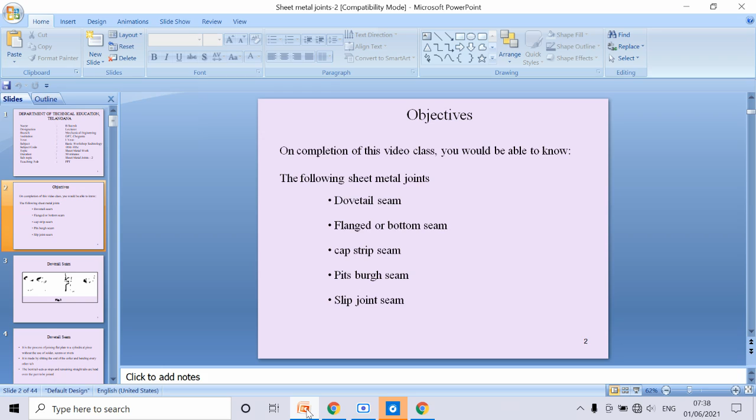I am going to deal with a subject called basic workshop technology, and the major topic is from sheet metal work. Today we are going to discuss some sheet metal joints. By completing this video class, you'll be able to know the following joints. In the previous class, we learned some sheet metal joints, and continuing with that, here are the different sheet metal joints: first dovetail seam, second flanged or bottom seam, third cap strip seam, fourth Pittsburgh seam, fifth slip joint seam. Now we'll discuss all five types of sheet metal joints.

Among them, the first is dovetail seam. Here we can see the diagrams of different components made by the dovetail seam joints of a sheet.

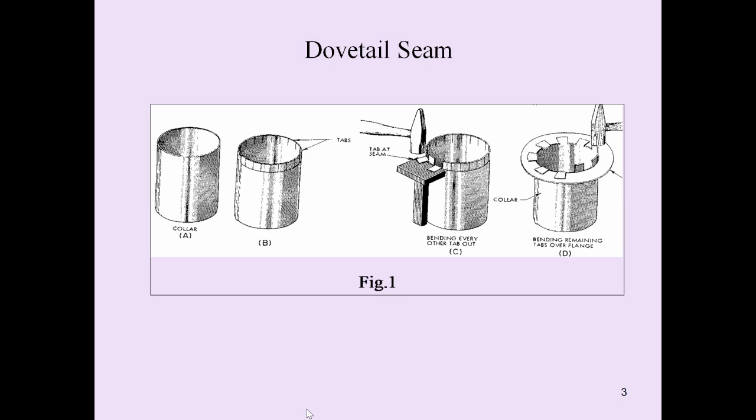In the picture, this is called a collar. On top of the collar, we have marked some marking lines to make cuttings on the mark points. In figure B, it shows some of the tabs. In figure C, it shows bending every other tab outward. In figure D, we can see bending the remaining tabs over the flanges. Here he is performing the remaining tabs over the flange. Now we'll discuss about the dovetail seam.

A dovetail seam is the process of joining a flat plate to a cylindrical piece without the use of solder, screws, bolts, or rivets. In this process we are making a joint between the flat plate and the cylindrical piece without using soldering, screwing, bolts, rivets, welding, etc.

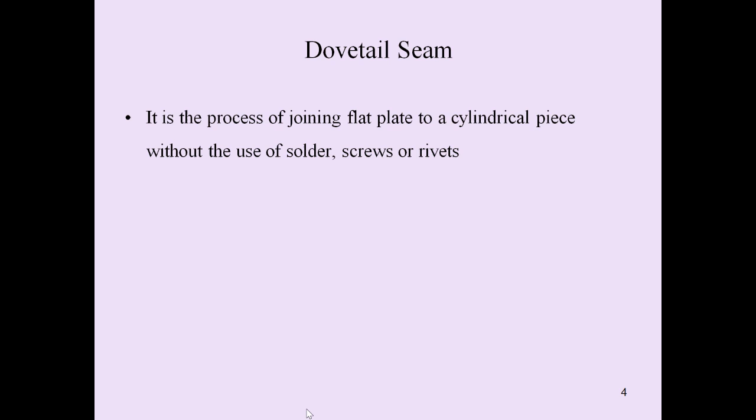This joint is made by slitting the edge of the collar. So how is this dovetail seaming joint formed? It is made by slitting the edges of the collar sheet and bending every other tab.

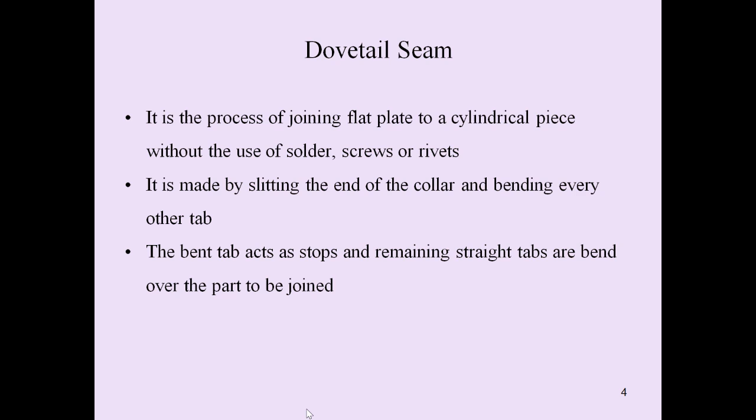The bent tabs act as stops, and the remaining straight tabs are bent over the parts to be joined. That is the dovetail seam.

The next one is the flanged or bottom seam, the second type we are going to discuss. We can see the diagram of a flanged bottom seam.

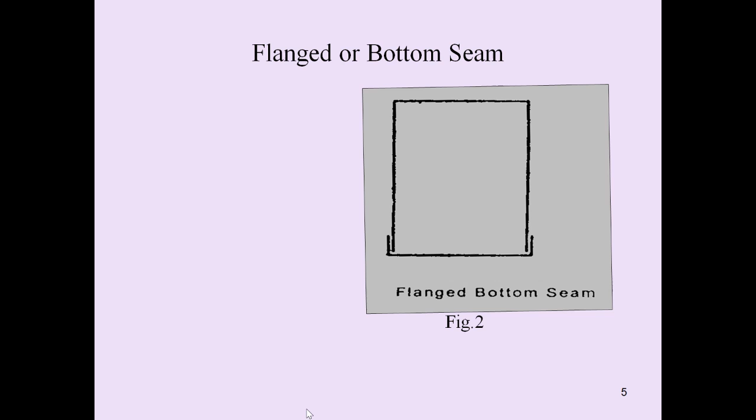Here we are using two different metal sheets. This bottom seam is used to join the bottom of the container to its body.

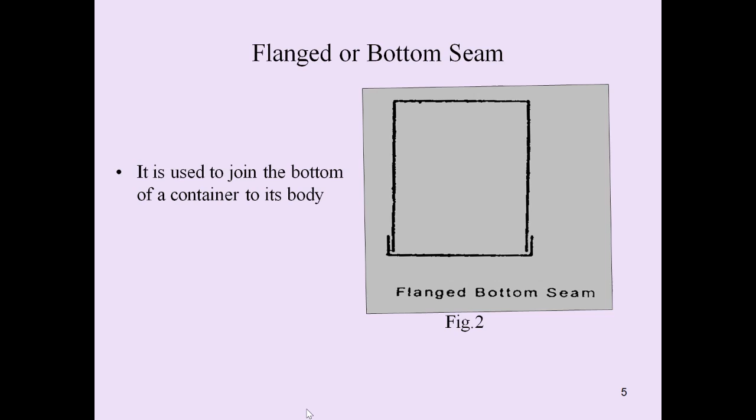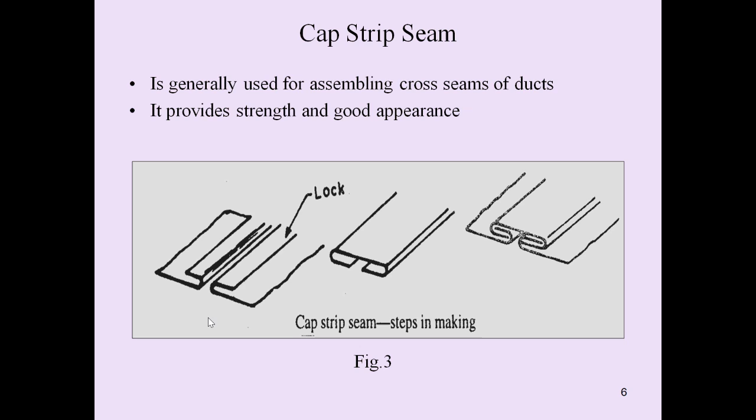Then we have to insert these two sheets into the third sheet, making a lock joint called the cap strip joint. This cap strip seam is generally used for assembling cross seams of ducts. It provides good strength and good appearance.

Next one will be a Pittsburgh seam.

The Pittsburgh seam consists of two parts: the single lock and the pocket lock. These are the two parts for the Pittsburgh seam.

The single lock is placed in the pocket lock and the flange is hammered. So part 1, the single lock, is placed into part 2, the pocket lock, and the flange is hammered.

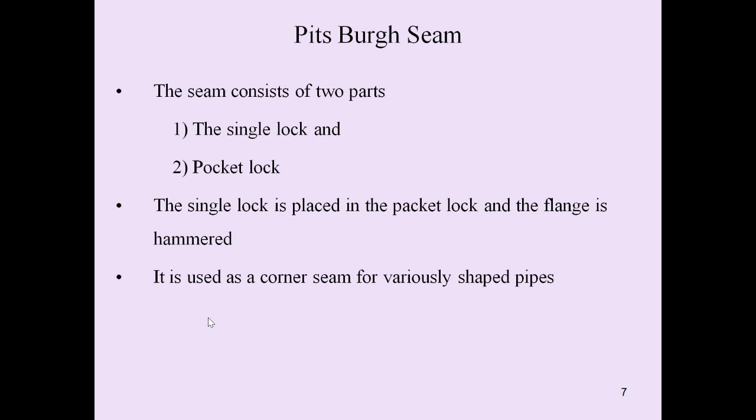This type of seam is used as a corner seam for variously shaped pipes. Next we can see the diagrams of Pittsburgh seams.

This is a Pittsburgh lock, and this will be the preparation of a Pittsburgh lock. This edge is placed into this preparation of the Pittsburgh lock.

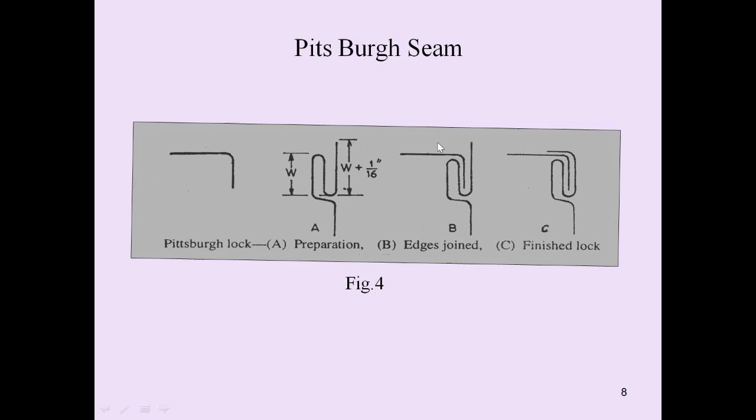So it is just joined, then finished as a lock. By bending this flanged part of the sheet, we are making the finished lock.

Next one will be a slip joint seam. We can see the diagrams of a single lock, double lock, and locks slipped together. This is a slip joint seam.

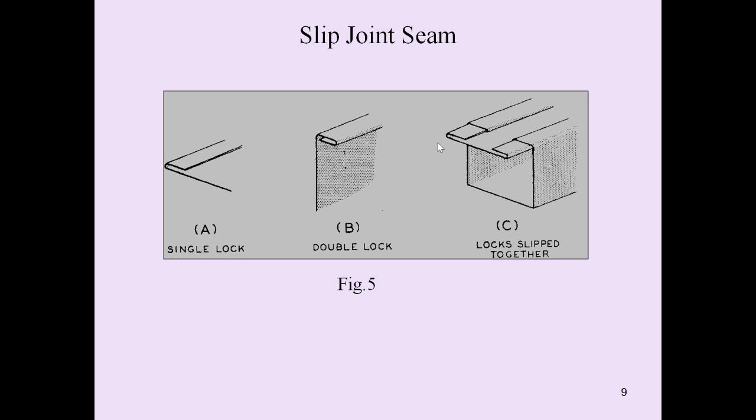This seam is used for longitudinal corner joints. So the seam is used for longitudinal corner joints.

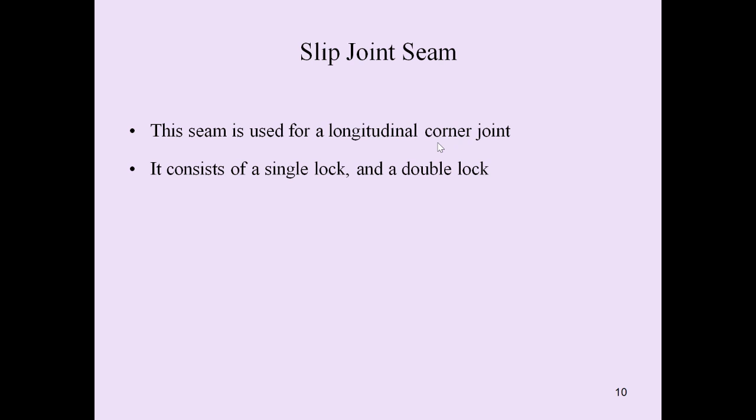This slip joint seam consists of a single lock and a double lock, that is two parts. The single lock is slipped into the double lock to complete the assembly of the seam.

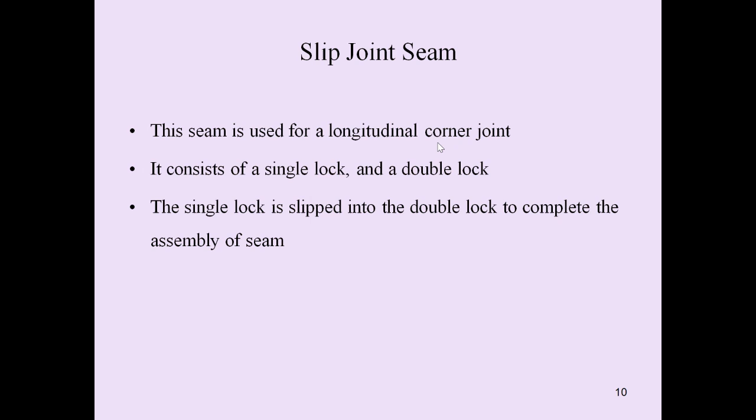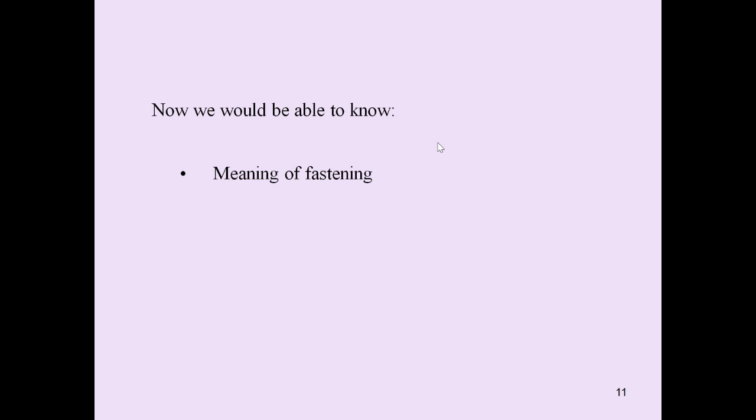Next, we would like to know the meaning of fastenings. So actually, what are fastenings? We can see the fastening definition.

Fastening means joining two parts of a production or product during the manufacturing process. This is the definition of fastening: joining of two or more parts of a product during the manufacturing of the component.

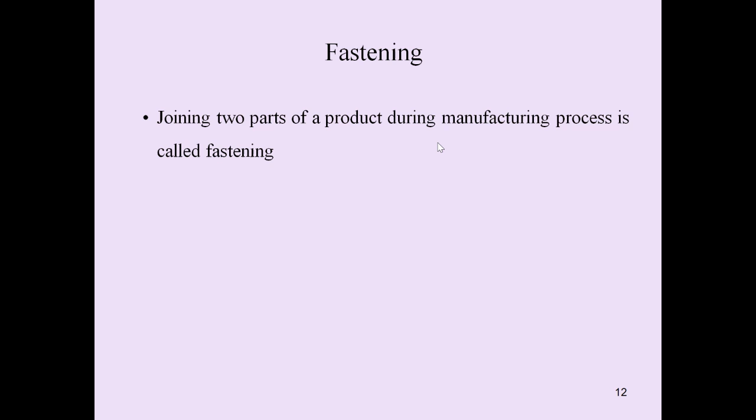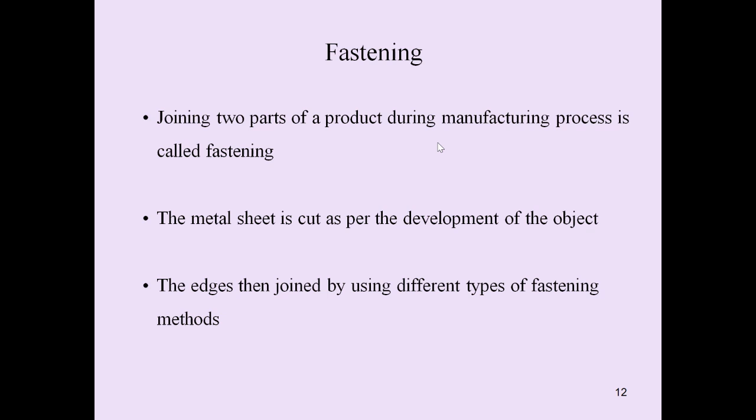The metal sheet is cut as per the development of the object. Based on the development of the object, the sheet metal is cut. Next, the edges are then joined by different types of fastening methods, where the operator joins the edges of the sheet.

We can see the different types of fastening methods: the first one is riveting, second soldering, third brazing, and the fourth one is spot welding. These are the four types of fastening methods, which we will now discuss briefly.

Riveting, the first method, is a permanent fastening method. This riveting is a permanent fastening method using rivets, which also have different shapes and sizes. By using those rivets, we are making a permanent joint.

The rivets are used to join two or more sheets of metal together, using different sizes and shapes of rivets.

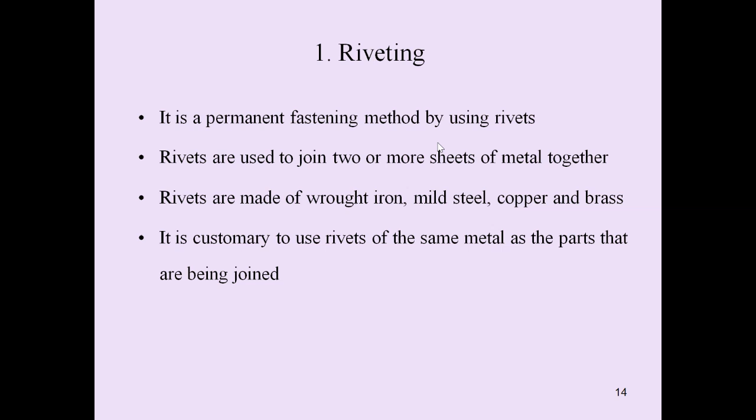These rivets are made of either wrought iron, mild steel, copper, or brass. It is customary to use rivets of the same material as the parts that are being joined.

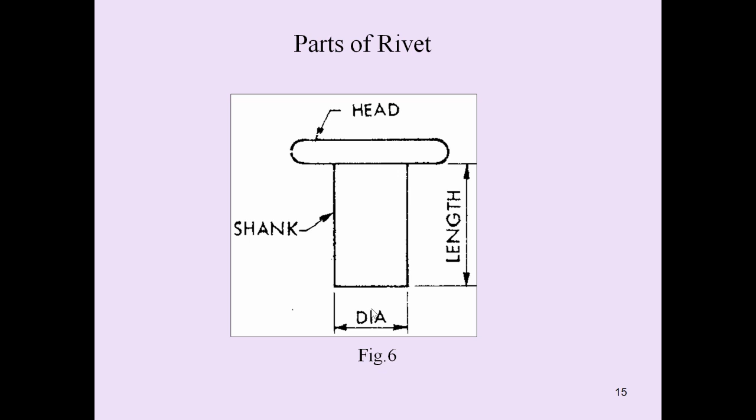Next, we can see the parts of a rivet. This diagram shows a rivet with a rivet shank and a rivet head. From this point to this point is the shank length, and this is the diameter of the shank. These are the different parts of a rivet.

Now we can see the different types of rivets. The first type of rivet is a snap or cup rivet.

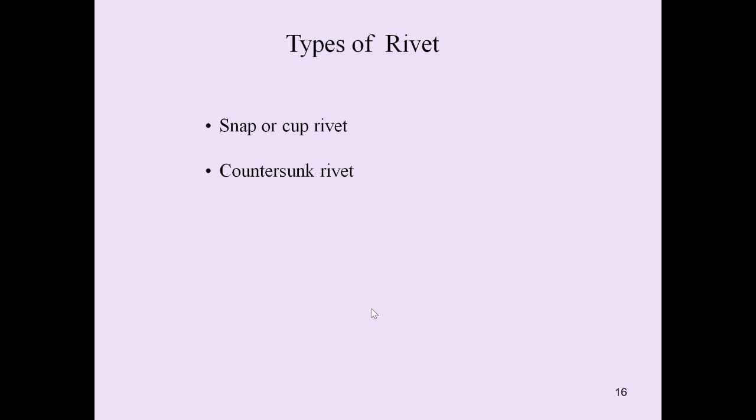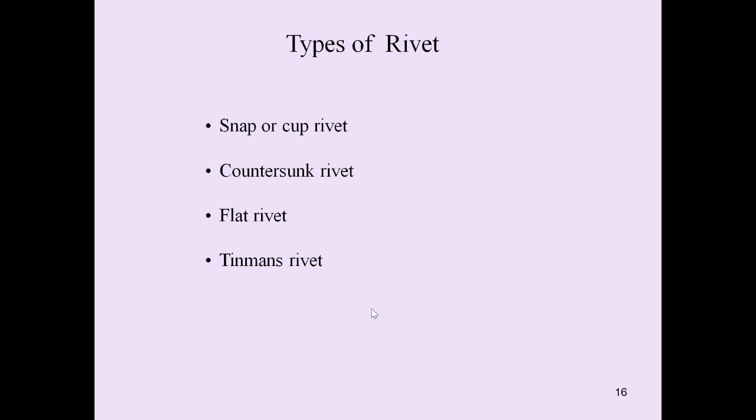Second, countersunk rivet. Third, flat rivet. Next, fourth is tinman's rivet.

Now we'll discuss all four types of rivets. The first one is the snap rivet or cup rivet. We can see the diagram of a cup or snap rivet. Based on the shape of the rivet head, it is named a cup rivet.

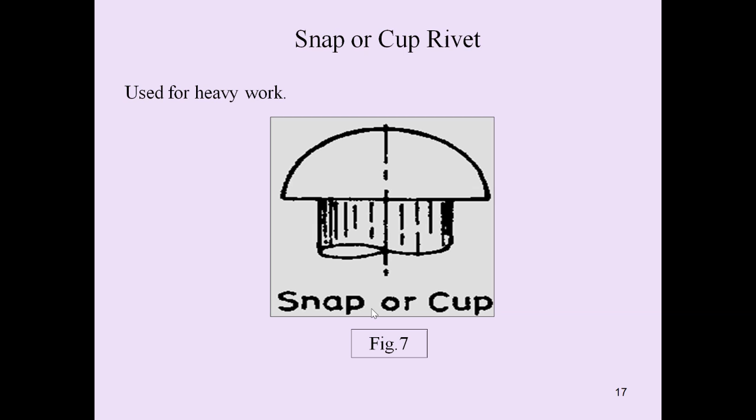The snap or cup rivet is used for heavy work. Next, the second one is a countersunk rivet.

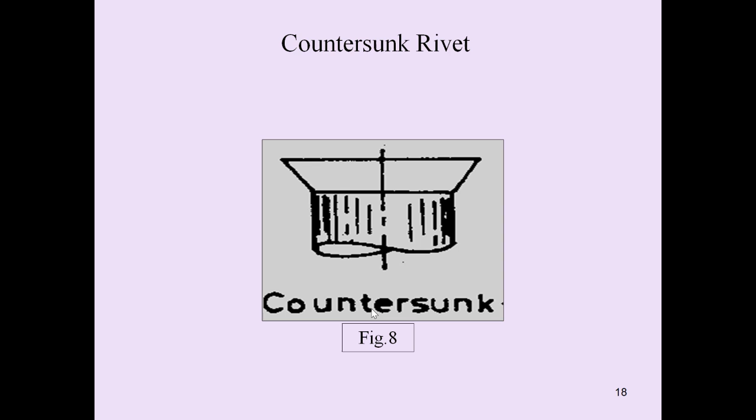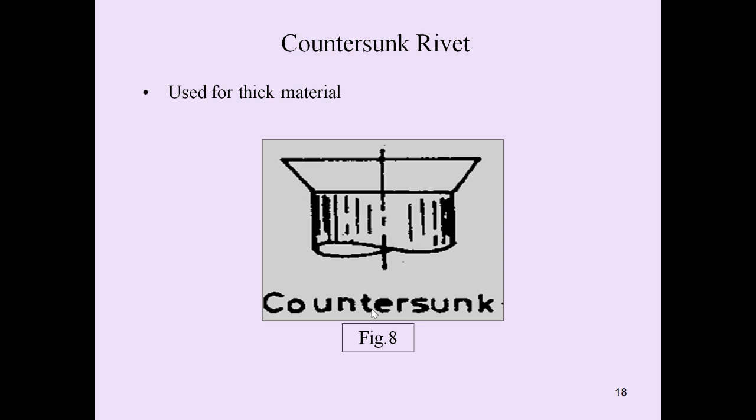This is a diagram of a counter sunk rivet. We can see the head of the rivet. Compared to the previous cup rivet, this is different, as it has tapers on the edges of the head. These rivets are used for thick materials.

Next one is the flat rivet. We can see here the head of the rivet is flat. These flat rivets are used for riveting flat bars and angle sections to sheet metal.

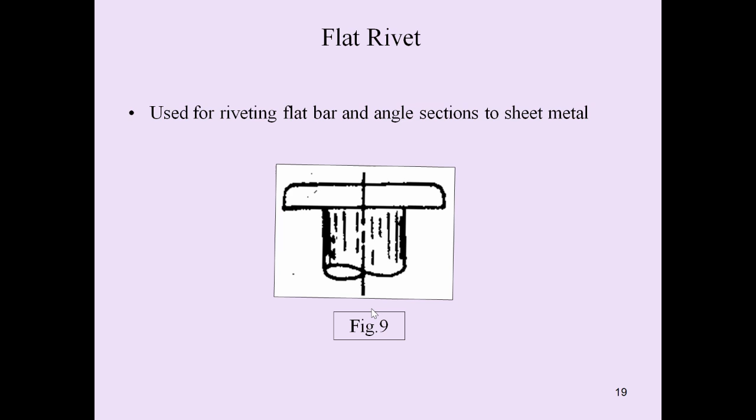Next, the last one is the tin man's rivet, used in different types of sheet metal work. We can see the diagram of a tin man's rivet.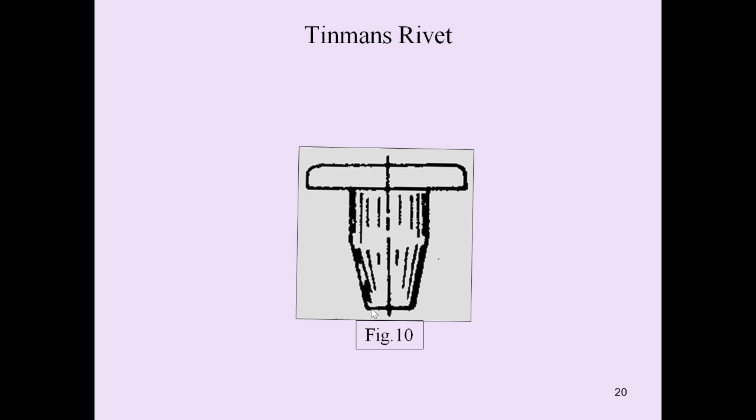The shank is tapered - this is a tapered shank tin man's rivet. The head is similar to the flat rivet, but the shape of the shank is different, it is tapered. This type of rivet is widely used in general work for general purposes.

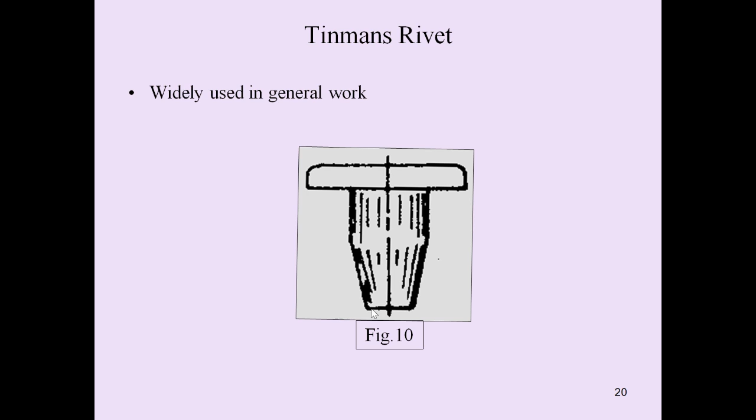Now we can see the stages of riveting. First, making the holes on the sheet - this is how we form a joint. The first stage of riveting is making the holes on the sheet.

The size of the hole depends on the size of the rivet, so we have to make the same size hole on the sheet. The size of the rivet depends on the thickness of the sheet, so based on the thickness, we select the size of the rivet, and based on that, we make the same size holes on the sheet.

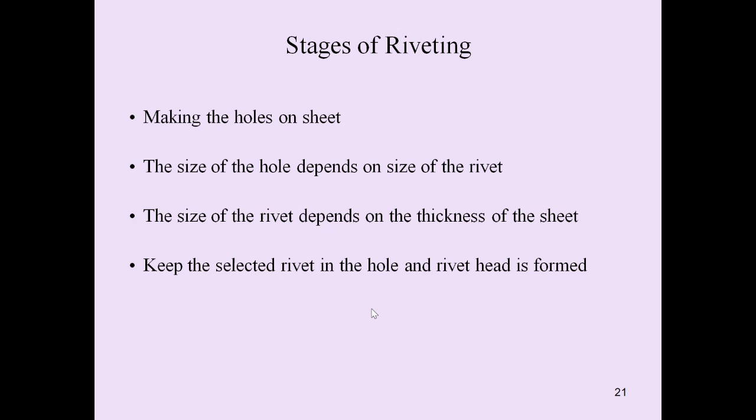Next, the fourth stage: keep the selected rivet in the hole, and the rivet head is formed. After the third stage is completed, keep the selected rivet within the hole, and the rivet head is formed by blowing on the remaining projection of the rivet, so that the rivet head is formed.

The rivet head is made using a rivet set. By giving two blows on the rivet set, we can form the rivet head. One blow flattens the rivet down, and the other blow completes the forming of the rivet head.

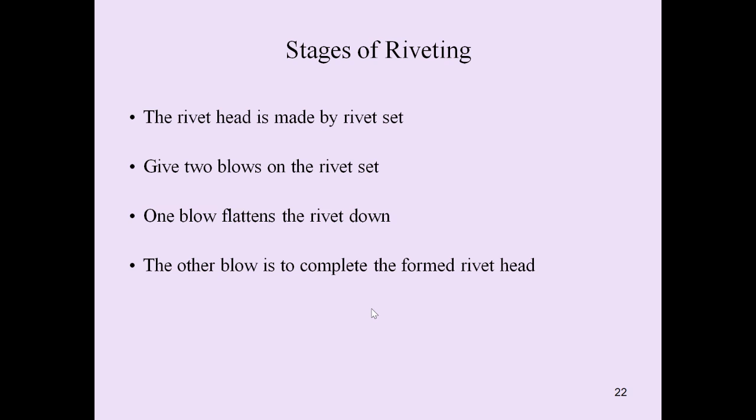Next, we continue the stages of riveting. In the first figure, drawing the rivet up. Second, shaping the rivet head by giving blows with the hammer. And the third one is forming the rivet head.

Okay, so we can observe the figure here. In the drawing of the first one, we are using the rivet set. On the rivet set, we have to give the blow.

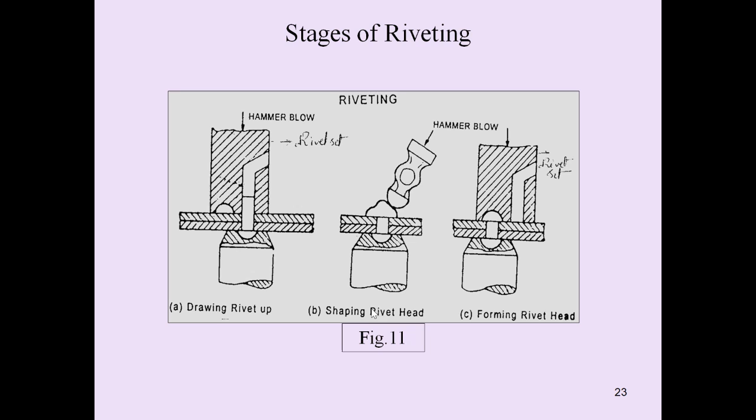Next we can see the riveting seam. This is a diagram of a riveting seam. In this way, we are joining the two metal sheets. We just have to give the blow on the rivet set so that we can make the rivet heads, so that we can make the rivet joint.

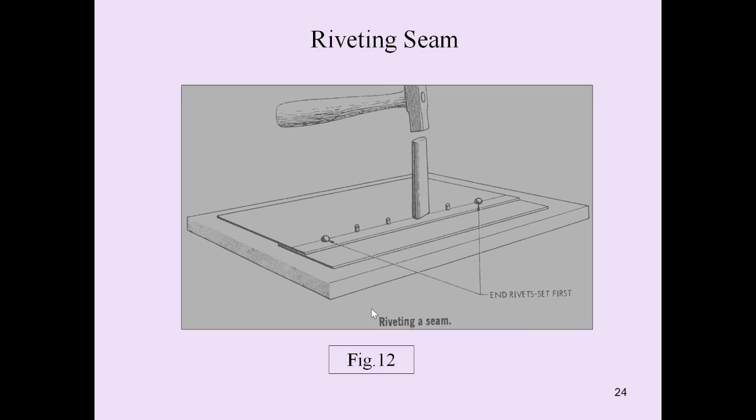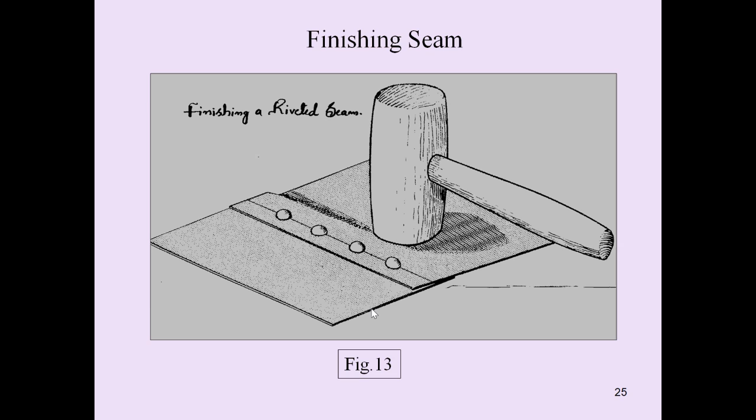Next is the finishing seam. We can see the finishing seam diagram. This is the way of finishing the seam after riveting, that is, finishing a riveted seam.

So the next fastening method is soldering. We already discussed soldering iron in the previous class, so now we can discuss this in brief. Soldering is the process of joining two or more pieces of metals by means of an alloy. Here we are making a joint of two or more metal pieces using an alloy.

The melting point of the alloy is lower than the base metal. The base metal is nothing but the two metal pieces being joined. So the melting point of the alloy, whatever metals you are using, should be lesser than the melting point of the base metal.

This alloy is called solder. The solder is composed of lead and tin. So here we are using lead and tin as the alloy metals. By combination of those two, lead and tin, we are making an alloy, and that alloy is called solder.

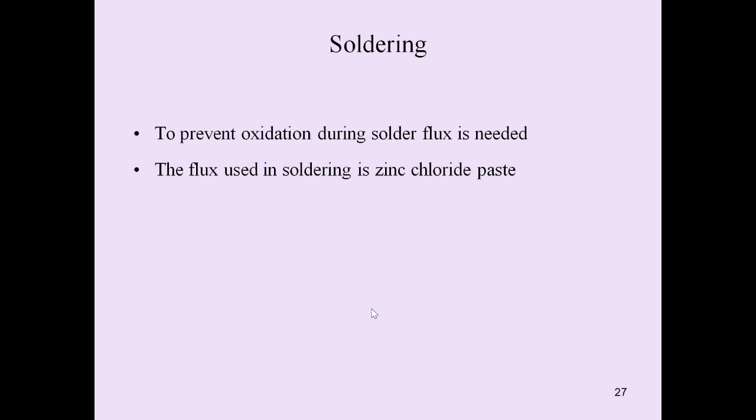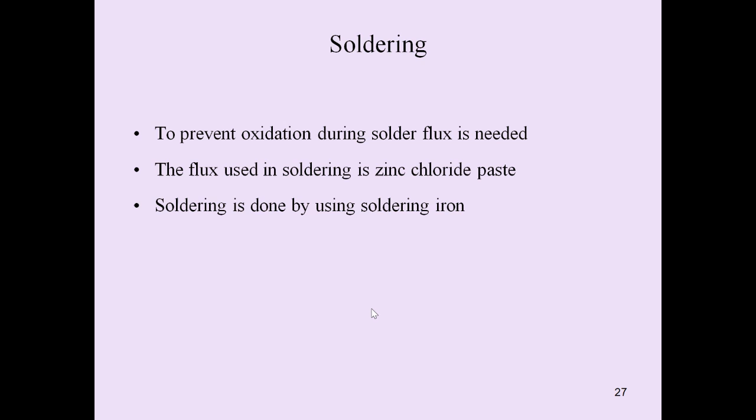The soldering is done by using a soldering iron. By using a soldering iron, we are performing the soldering operation. This process is adopted for joints for watertight seams.

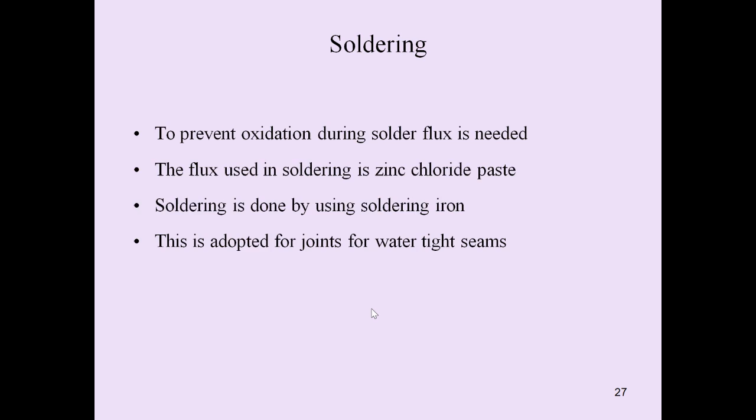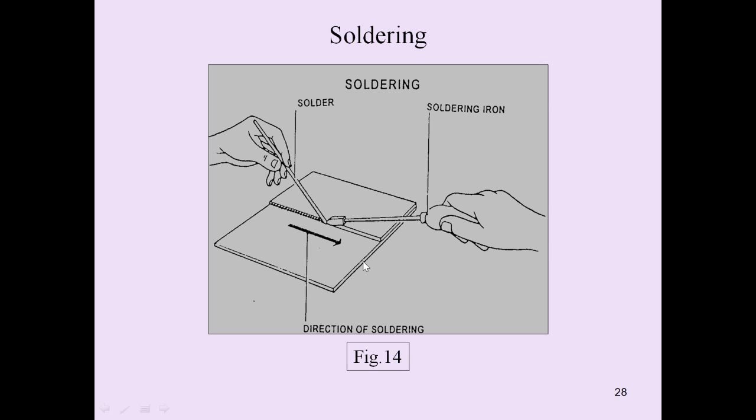You can see this is a diagram of the soldering process. Here we can see this will be the solder, the lead and tin material, and this will be the soldering iron. This is the direction of the soldering, that is downward or rightward direction.

Next we can see the stages of soldering.

Before going to soldering, what do we have to do? Clean the surfaces of the jobs thoroughly, that is, without having any dust. Just clean the surface of the workpieces.

Next, fix them in the bench vise. Whatever metals are going to be joined, those metals are going to be fixed in the bench vise.

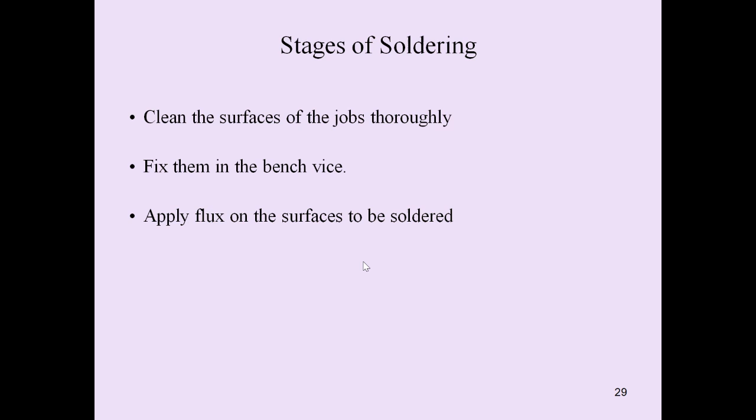Then after that, apply flux on the surface to be soldered. What type of flux? Zinc chloride paste. We are applying the zinc chloride paste as a flux on the area which is going to be soldered.

Next, heat the soldering iron to the required temperature. So we have to heat the soldering iron to a required or appropriate temperature.

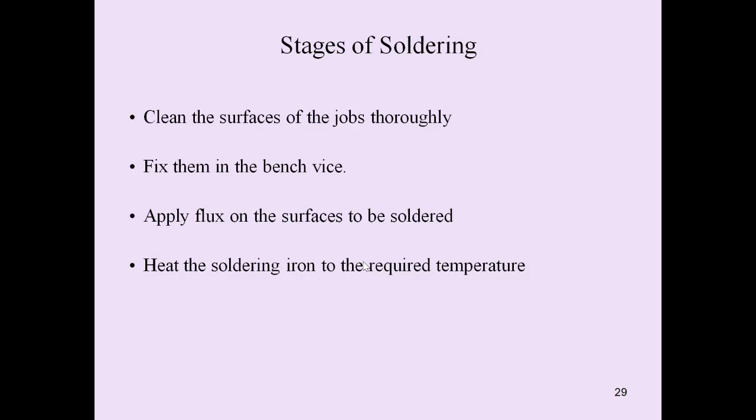Next, dip the soldering iron bit into the solder. So then we have to dip the soldering iron bit into the solder.

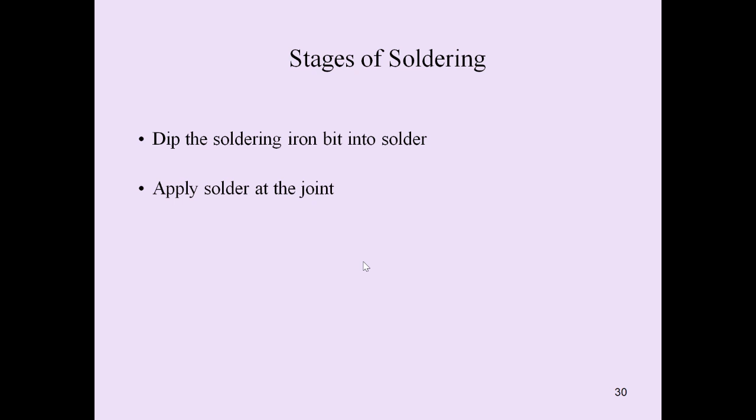Then apply solder at the joint, the place which is going to be joined, that is the joint area. Next, after cooling, clean the joint with water or cloth.

Okay, after solidification or cooling, clean the joint area with the help of water or a cloth.

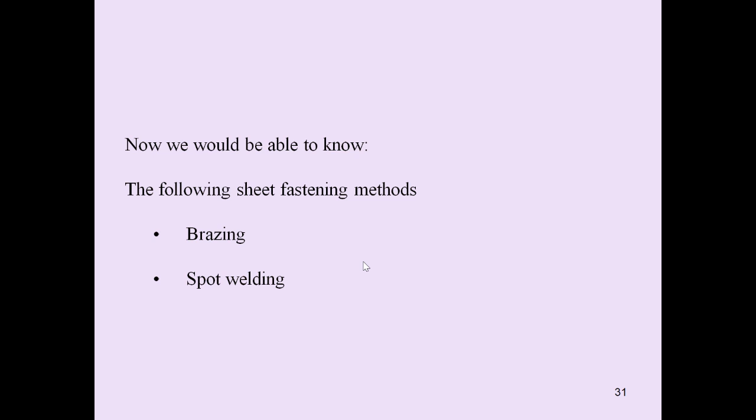Now we can see some of the fastening methods, that is brazing and spot welding. We already discussed the first two, riveting and soldering. So the third one will be brazing.

This brazing is similar to soldering. The brazing fastening method is similar to the soldering process only, but it gives a much stronger joint as compared to the soldering joint.

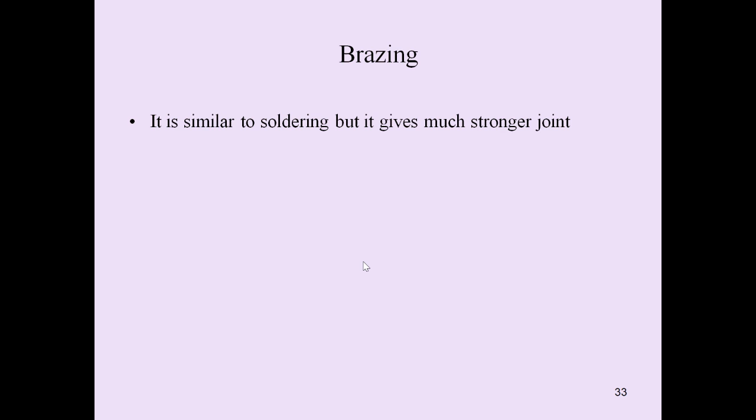So actually what is brazing? Brazing is a process of joining two or more similar or dissimilar metals by means of an alloy.

So what are similar metals? Two metals having the same properties, for example iron and iron, copper and copper, brass and brass, silver and silver, lead and lead. Even though there are two, those are similar metals.

So dissimilar means we are using two different types of metals, such as brass and copper, tin and lead. So this process is joining two similar or dissimilar metals by means of an alloy.

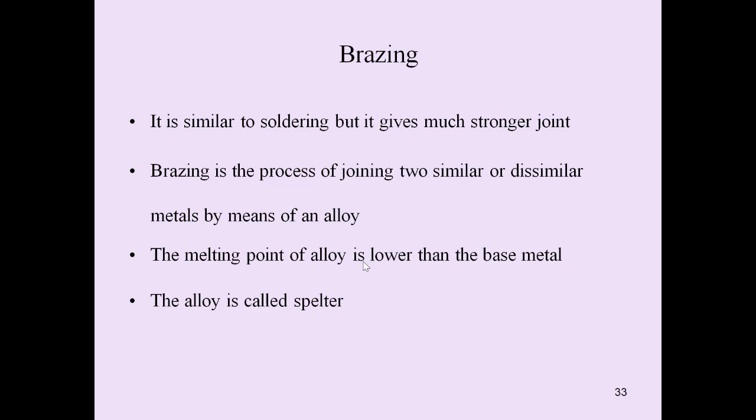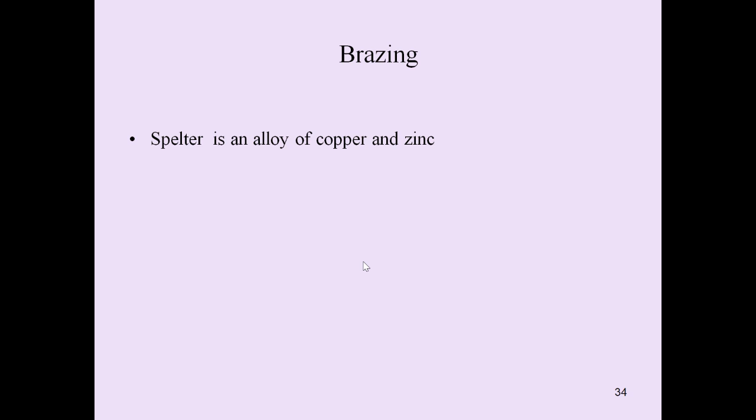The melting point of the alloy is lower than the base metal, similar to soldering. The alloy used in brazing is called spelter, while in soldering it is called solder. Spelter is an alloy of copper and zinc.

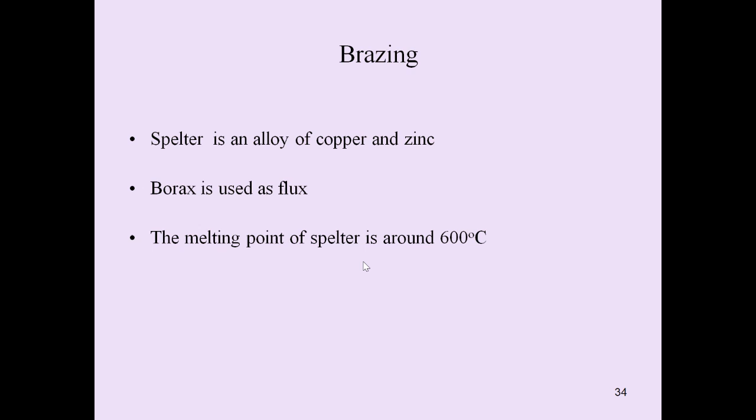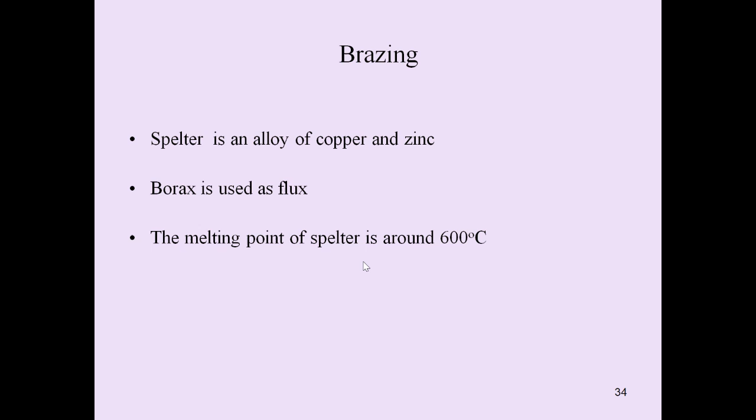Borax is used as a flux here. The melting point of spelter is around 600 degrees centigrade.

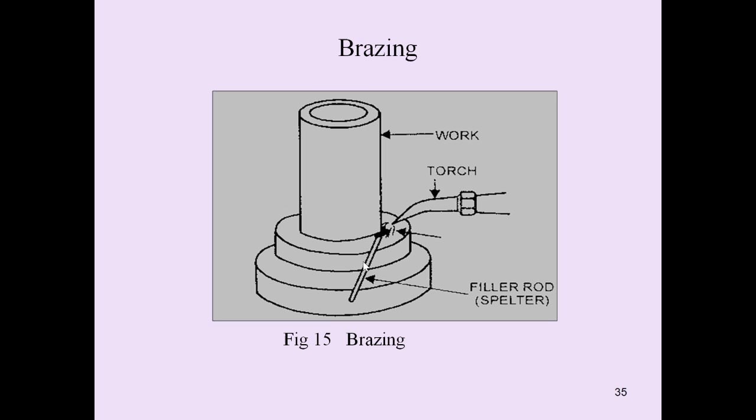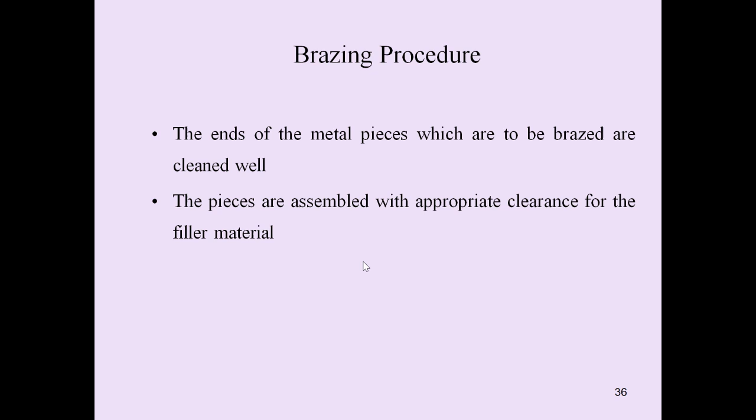Now let's see the brazing procedure. The ends of the two metal workpieces which are to be brazed should be cleaned well. Next, the pieces are assembled with appropriate clearance for the filler material. Then the flux, that is borax flux, is applied on the joint ends.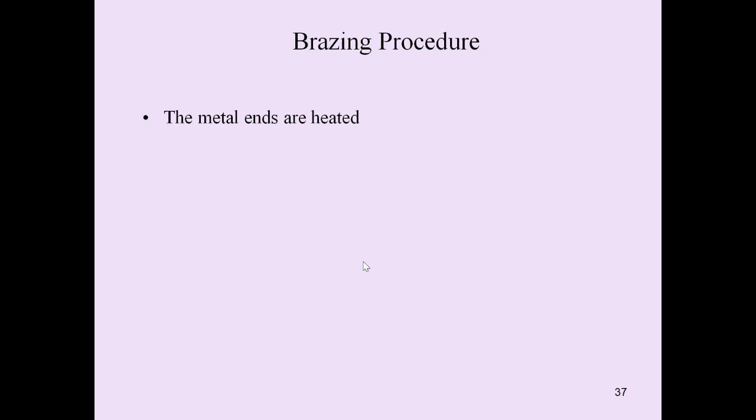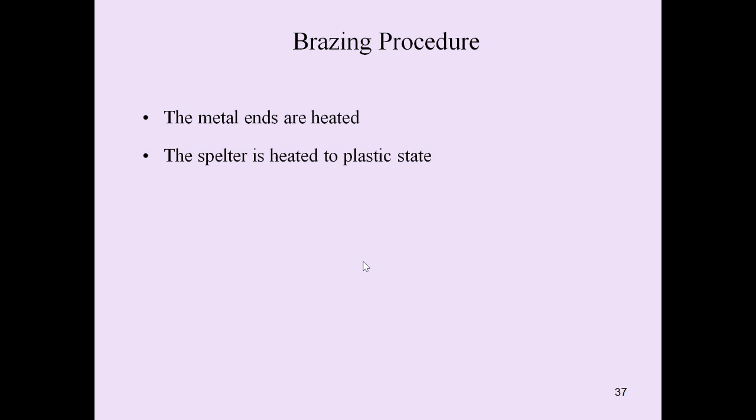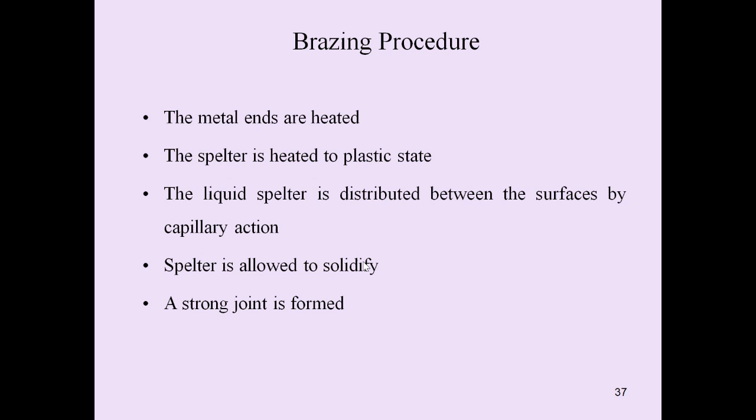Next, the joint ends, that is the metal ends, are heated. The spelter is then heated to a plastic state, so the liquid spelter is distributed between the surfaces by capillary action. The spelter is allowed to solidify, and then a strong joint is formed.

And the last fastening method is welding. We can see here, that is spot welding. So actually, what is welding?

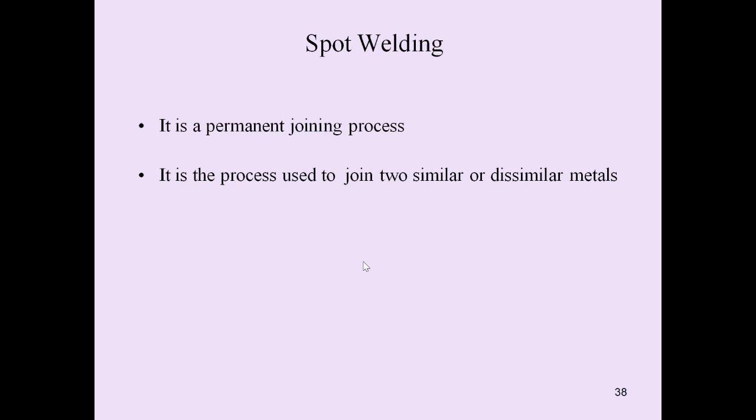Welding is a process of joining two or more similar or dissimilar metals, though it has a number of definitions. The spot welding is a permanent joining process, used to join either two similar metals or dissimilar metals by the application of heat, or heat and pressure.

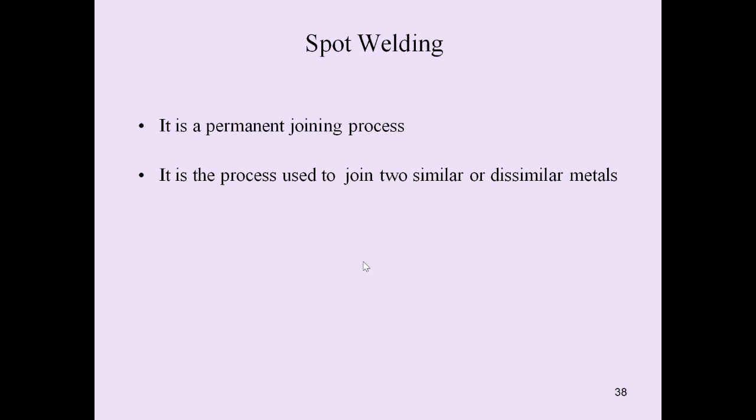While applying heat and pressure, the interatomic bonds of the metals will change, and that's how you make a joint. The metals are joined by the application of heat and pressure, and the joint is filled with filler material.

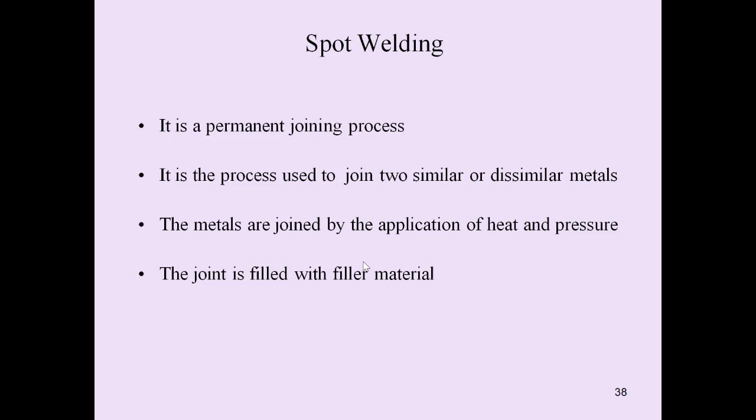Now we can see the principle of spot welding. Spot welding uses the principle of resistance welding.

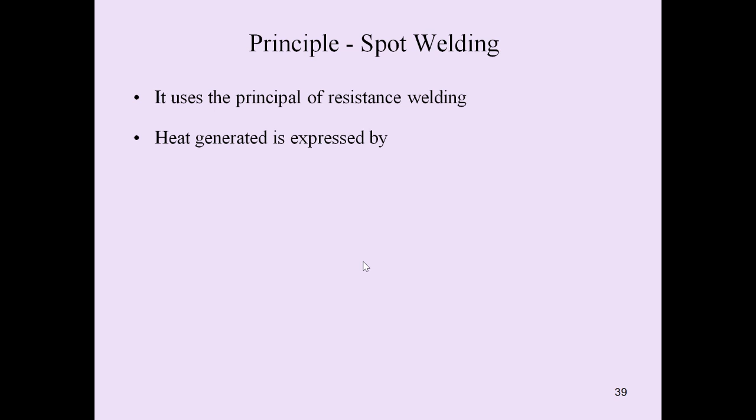The heat generated is expressed by the equation H equals I squared R T, where capital H is the heat generated during welding, I is the current, R is the resistance, and T is the time of flow of current.

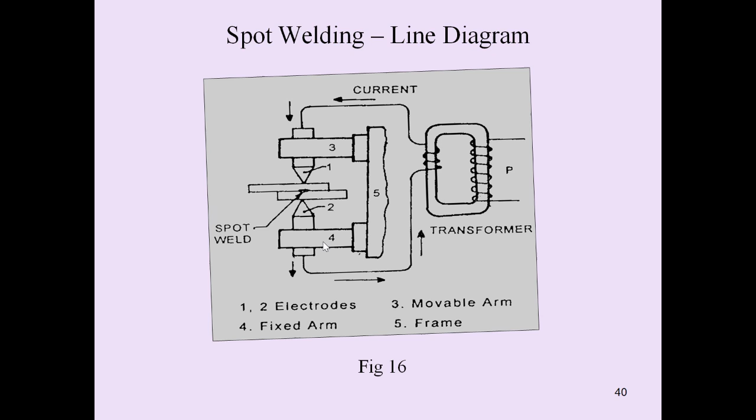Between those two electrodes we are placing two similar or dissimilar metals, which are going to be welded. Now we can see the procedure of spot welding.

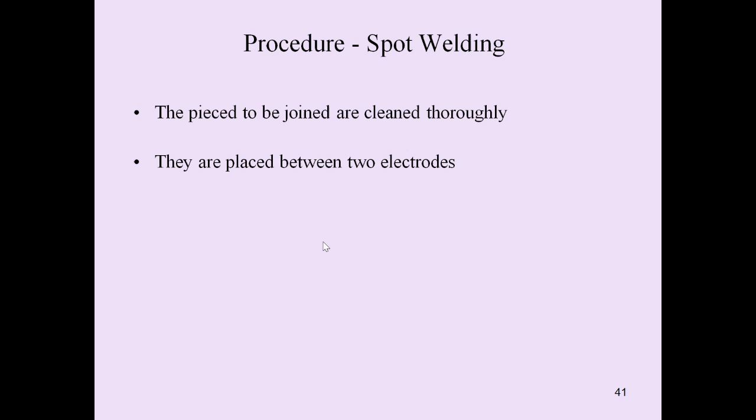The pieces to be joined, the metal pieces which are going to be joined, are cleaned thoroughly. Next, they are placed between the two electrodes.

Next, the electrodes are pressed to get the required pressure on the sheets, by moving the upper arm onto the metal plates, so we can get the pressure applied on the sheets.

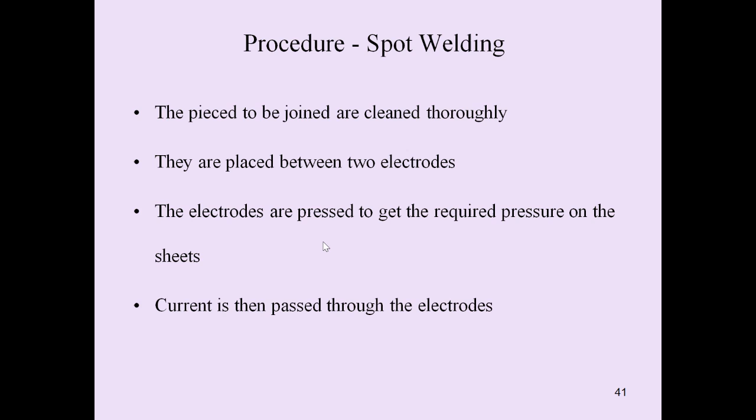These two are the work materials, either similar or dissimilar metals, which are going to be welded. This will be the movable electrode, and this is a tong, that is the arm, the movable arm. For this, the electrode is fixed, and this will be another arm, that is the fixed arm.

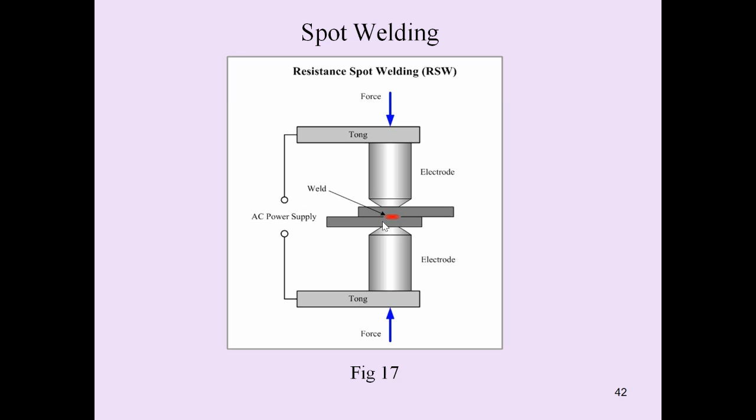By moving these arms, we can apply the pressure on the metal sheets, so that we can make a joint by the application of pressure and also heat.

The metal plates are heated to a plastic state by the passing of current into the electrodes. Then the metal under the electrodes is pressed and squeezed.

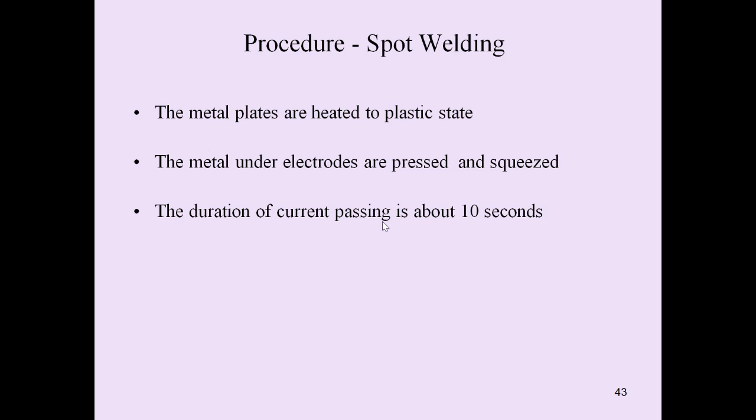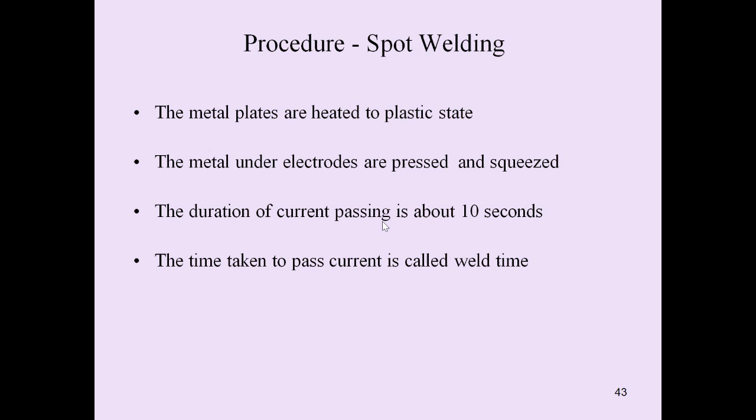During the current passing, the duration is about 10 seconds. The time taken to pass the current into the metal plates is called weld time.

On cooling, the joint is welded. The whole process, that is the whole spot welding process, is completed in 30 to 60 seconds.